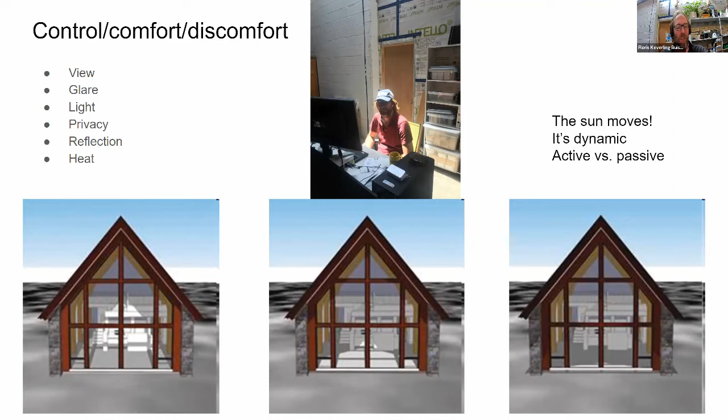But the sun moves, it's dynamic. So how can we actively manage it to help our passive house envelope? Why don't we do this on the inside? Well, if we do this on the inside, as you see here on the right side, the heat's already in the building. If the heat's already in the building in the summer, it's not as effective as doing it on the outside.

If you don't get any direct sun, we cut out a large part of the solar heat gains. There's a little bit of diffuse or reflected solar heat gains, but if you get the direct sun out of the building, this makes a big difference.

The glazing, if you know the glazing IGU nomenclature, on surfaces 2 and 5 there's normally the low-E coatings in the triple pane. It helps tremendously with improving the U-values of the IGU, but it also means the heat stays in the building, which is nice when you want it to, but not so nice when it's already in there, trapped between your interior curtain and the glass. It will most likely end up on the inside.

And as Nick Grant shows here, summer comfort isn't just about air temperature. We've learned about radiant discomfort, which can be cold radiant discomfort, but it can also be hot radiant discomfort in the summer. So move away from the hot glass. If we shade our glass, the glass will be colder, which also will prevent radiant discomfort.

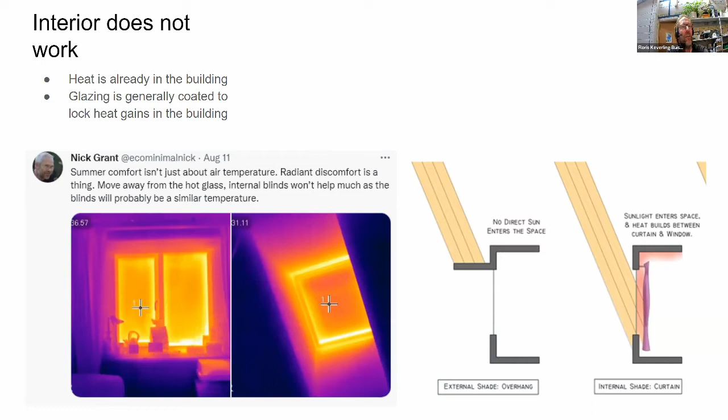So how do we apply this? How can we use our shades? Well, the benefits of exterior shading are universally applicable, not just to passive house. Any building can benefit from this. It can be found on all building types in a variety of climate zones: offices, schools, housing.

Even the old factories, the shed roof on the old factories, and artist studios, provided northern light, so you get the daylight without the heat. Unfortunately, no heat in the winter, but also no heat in the summer, which is critical in a passive house where we actually want to employ the high solar heat gain in the winter with the low sun angle, so it actually shines into the building.

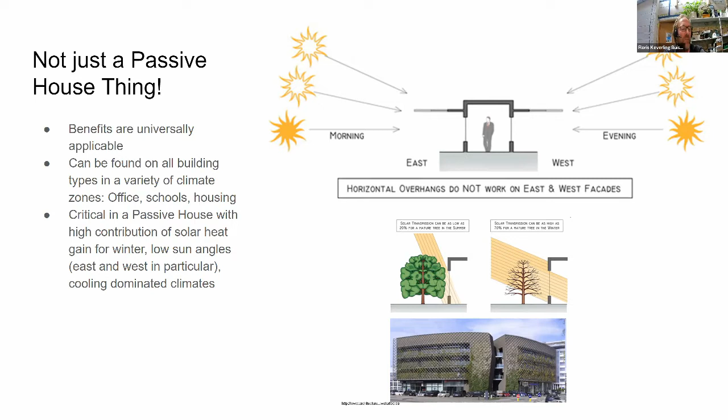But if we have cooling, now we need to keep it out at the same time. Of course, our deciduous trees can help with this, as shown here, but we also can automate this with exterior shading systems.

So here we see what the PHPP, as a ground rule, shows this effect of interior shades versus exterior shades. Exterior slats keep 94% of the heat out, and that's on top of the solar heat gain factor of the glass. So if the solar heat gain factor of the glass is 50%, it blocks 50%, and then we knock it down another 94%, to 0.06.

If you do it on the interior, you only get 30% of that solar heat gain blocked. And then, Tim, you want to expand on this, for how you enter this?

I'll feed in exactly. A little bit from the practitioner's desk here, as far as controls go, which is another subject we're bringing to you today. Once you have exterior shades, it's all about what you're going to do with them. Are they static? Are they manually controlled? Are they automated? Passive House Institute has looked at that as well. I can't exactly explain why they came up with the numbers they do, but we printed them on this slide for your reference.

In the PHPP, it's assumed you'll have a 70% reduction when manually operated exterior shades are used, and 80% reduction when automated. For the overheating potential of the building, the PHPP assumes 90%. I assume we could argue with the PHI whether these are fair numbers that represent these use cases, but it's something you need to keep in mind when modeling exterior shading.

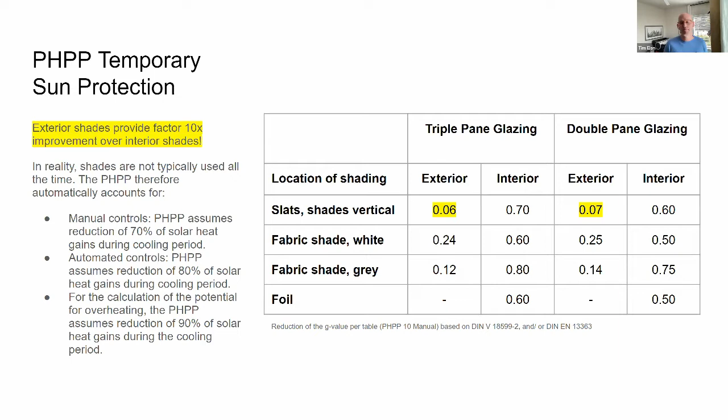I would add to that, from living with shades, you can see perhaps over my shoulder, that in reality, even if you have an automation system, you may still use manual controls from time to time and do overrides. I couldn't necessarily tell you how good these percentage numbers are that the PHI provides, but I can tell you from projects that are entirely manually controlled, that's never as good as having an automation system. If the owners aren't home, the shades aren't being controlled, so they may stay up or down, which means something. I live with a system that is fully automated, but we still as a family override that system from time to time. So just keep that in mind when modeling shading in the PHPP.

Yeah, so then if we look at the building code, you can see that it puts a very low bar and makes a simplification. In the heating dominated climate zones 4 through 8, the solar heat gains are actually free to choose in 5, 6, 7, and 8 - marine 4 is free to choose. But in the other 1 through 4, we are actually limited to the amount of solar heat we're allowed in, which especially in 4 is still a very heating dominated climate.

Of course we want to also avoid overheating, but the motorized shade should be an option to achieve summertime comfort and solar heat gain limitation while optimizing wintertime solar heat gains through fenestration. You can see we're underheated in the winter, but in the summer we could be overheated. But there's this shoulder season - if we have fixed shading, we have excessive shading in March and April. If we use movable shading, we can really optimize this and make the shoulder season longer, so we can passively heat the building but also avoid active cooling in the summer for a longer period of time. So the best of both worlds.

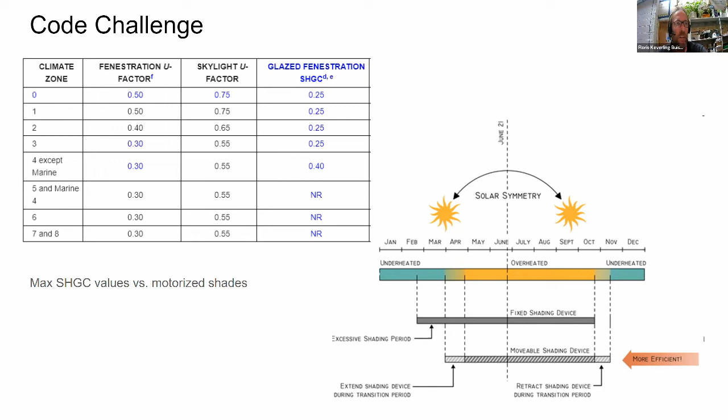Next slide. Here you can see max solar heat gain values versus motorized shades. Climate zone 4 is mixed, with a heating season larger than the cooling season in the figures below, heating degree days versus cooling degree days. But in 3C and 3A and B, it gets even more complicated - there's still a good heating load, but also a significant cooling load that we want to avoid.

Of course, climate zones 5 to 8 are heat driven purely, and that's why the ratings for solar heat gain aren't limited in the code. But we still want to keep that summer heat out where Tim lives, because there is still a cooling season there, even though the code doesn't acknowledge it. So in all climates, cooling should be avoided passively first, and we should try with active or passive manual blinds to stretch the shoulder season. That would be the optimum solution.

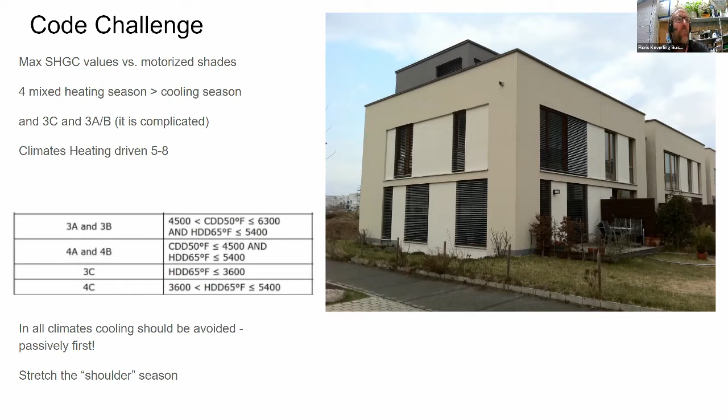Next slide. All right, I'll hook into it right here and talk to you a little bit about the system components, what makes up a good shading package.

Next slide. So the first thing we're going to look at here is the motorized shade itself. Most of you are going to be familiar with interior mini blinds, aluminum blinds, and for all intents and purposes, the exterior motorized shade is the larger version of that. Typically they're made from all aluminum, and we have slats that articulate in various widths and profiles. I'll talk about that a little more in a minute.

We have a line voltage motor at the top, and there's no smarts in that motor. Essentially, it gets power and it can turn one way or the other way, and that's all it does. As far as guides go, you get your choice of a fixed track, depicted in that image here, but there are also cable guided systems, which look more free-flowing or floating on a facade. In some instances where you have exposed glass corners that you want to shade, that's perhaps the more appropriate way of guiding the slats.

They can be mounted either on the exterior of the building in a recessed fashion, where they're either flush with the building facade or they stick out a little bit, or they can be fully integrated into the building where, essentially when they're up, you don't see them at all.

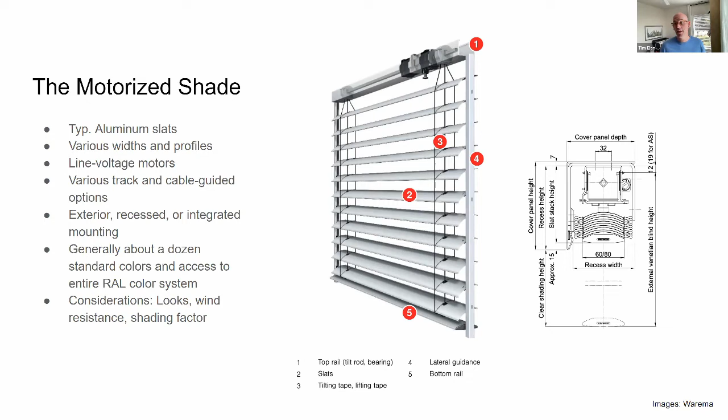I think it's fair to assume that they are safe outside for winds up to 30-35 kilometers an hour, so about 20-mile-an-hour wind gusts. The folded slats, on the other hand, can go quite a bit further, up to 80 kph, so about 55 miles an hour or thereabouts. They will be safe to be left in the down position.

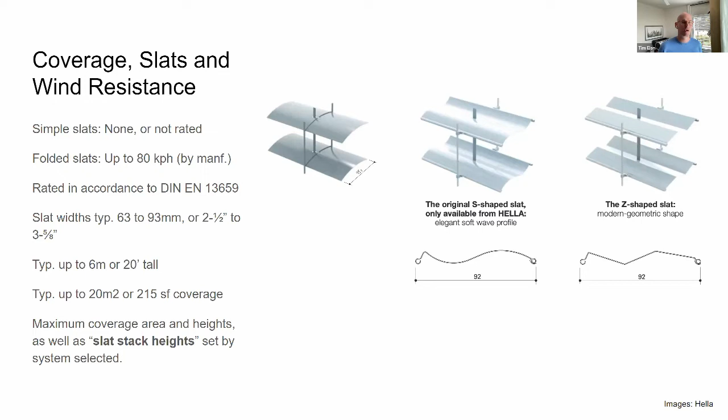So then let's talk about the shade box. That's essentially the container that the slats ride into when they're not being used. This can be purchased, this can be something that is made, or it can be a mixture thereof. It can be integrated into the building, it can stick out a little bit, it can be bolted to the face of the building. So it can be an invisible element where you don't really call attention to it, or it can be decorative - it can be a statement, something you integrate into your design language.

The size of the shade box needs to be sized exactly to fit the shade system, so this requires a little bit of integrated planning. What I didn't note here is that there's also a relationship between each window and the size of the shade that you put on it. One of the things we found over the many years we've integrated these into projects is that it makes a lot of sense to source these as one package with the windows you're purchasing, just to make sure there's good, tight coordination between the window sizing and the shade sizing, making sure they work well together.

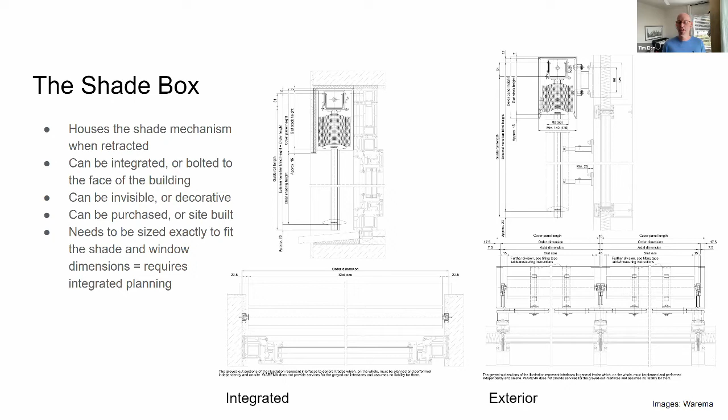In some cases the shade system may actually be affixed to the window itself. I don't want to go too deep on that today, but short of bolting it to the building, it can also become part of a window, storefront, or curtain wall system, which would suggest an even tighter integration when you're sourcing this. Next slide.

Next slide. So then I'll talk about the integrated shade box. This is the building that I'm standing in right now, a house I built a few years ago. And just a couple of pictures of an integration of a shade system.

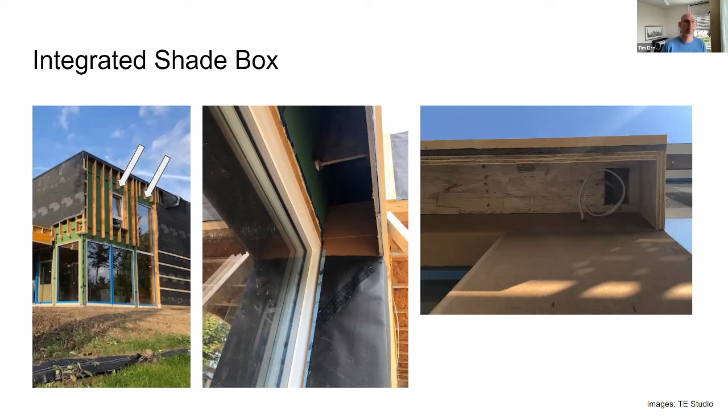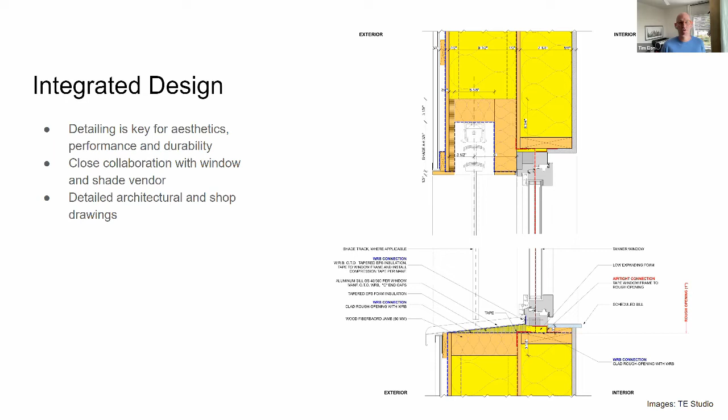So this sort of idea, as I mentioned, requires integrated design. The detailing here is key for the aesthetics, the performance, and the durability of something like that. Close collaboration with the window and shade vendor is needed to make sure this fits. Typically when we go into the shop drawing phase for a project like this, we send this to the window company and to the shade supplier, to make sure everything coordinates well with the architectural drawings and concept.

With some building automation, it can actually track where the sun is and adjust the shade accordingly. One of the benefits I tap with this system is that I favor daylight while still cutting the heat gain when I don't want it. So the opportunity here is that you reflect the daylight into the space so that it's well lit during the day, but you cut just enough sun so that direct heat does not penetrate the space.

As Floris pointed out, in a passive house in a cold climate, like I'm in climate zone 6 here in the US, you really want to manage that. We have tremendously low sun angles, especially on the east and west sides, where this becomes an absolute must, not to cook people out of those spaces. But on the south side, in the swing seasons, this becomes really, really important as well.

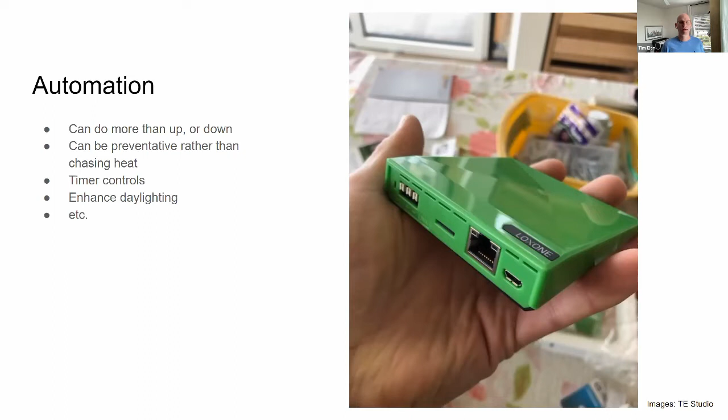Next slide. Then if you're going down the route of automation, now you can branch out into devices that can understand where you are on the planet. They can track the sun, they can track the climate inside, outside, the sun's position, as much from a daylighting perspective as a heating position. That can be a small little server like this. I'll let Igor expand on that. So that's the next step.

And then the last step of componentry that you need for a system is some kind of protection. So I want to be very clear here: these types of motorized shades we're talking about are not like the hurricane shutters in Florida. These are not to be brought down to protect your windows from damage when you get storms. They are purely here for all the benefits that shades bring to you: privacy, sun, heat, all of those things. And so they need to be protected.

And the two things you want to protect them from is high winds, as we already talked about a little bit, and the other piece is frost. That pertains to certain climate zones in the country like mine, especially in the swing seasons, early and late winter, where we may have conditions conducive to icing the shades over. You can imagine if a lot of ice accumulates on them, it becomes more difficult for them to move up and down or open and close. So a protection mechanism for frost conditions is also desirable.

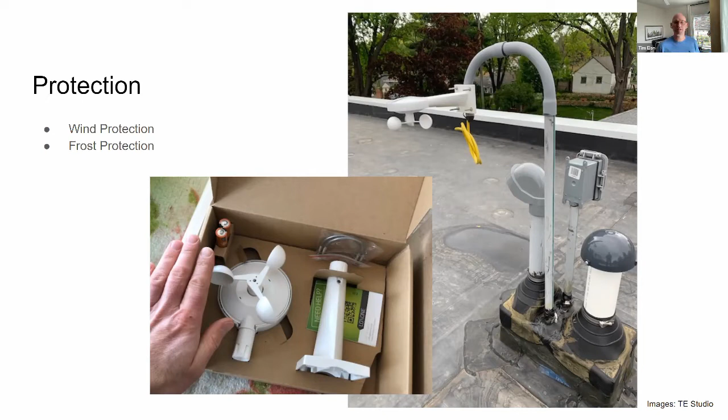Next slide. With that, I hand it over to Igor. Hi, everybody. I want to talk about the automation aspect of the shading from a standpoint that Tim and I discussed. It's a must for passive homes, cooling, heating, and I want to discuss why.

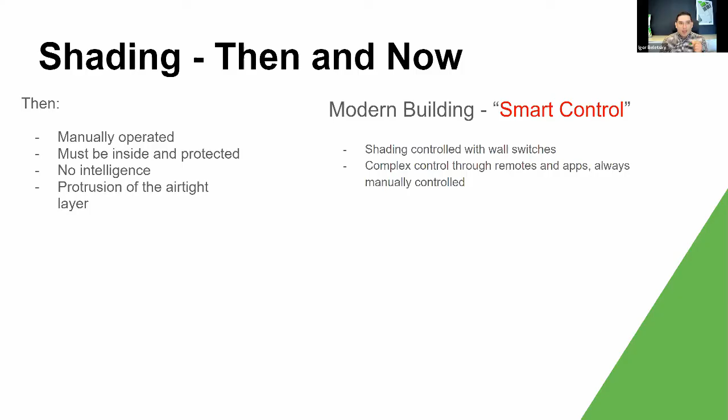So shading, what it used to be, as Tim mentioned, a penetration through the wall with a manual control. So whenever you had to adjust the shades, you would have to manually raise them and adjust them. It had no intelligence. You had to do it by hand, and again, protrusions through the airtight layer of your home.

Then came the smart control, which people call smart. I wouldn't necessarily call it smart. It was just control which you can operate without manual operation. You could press a button, or you can create scenes in the app where the shades would go up and down.

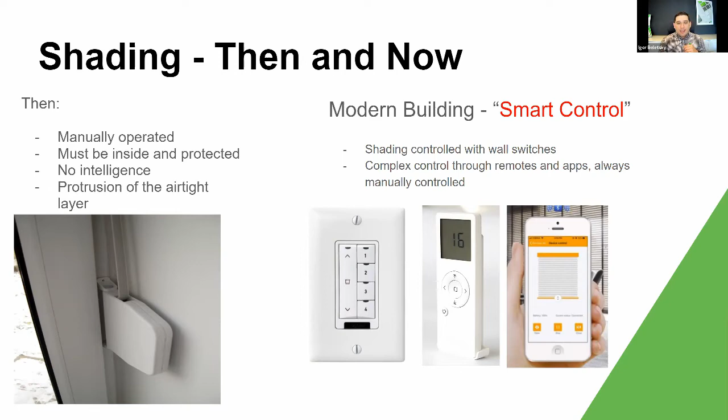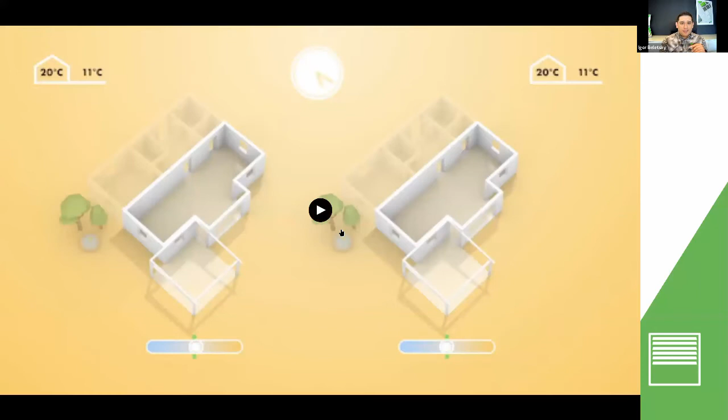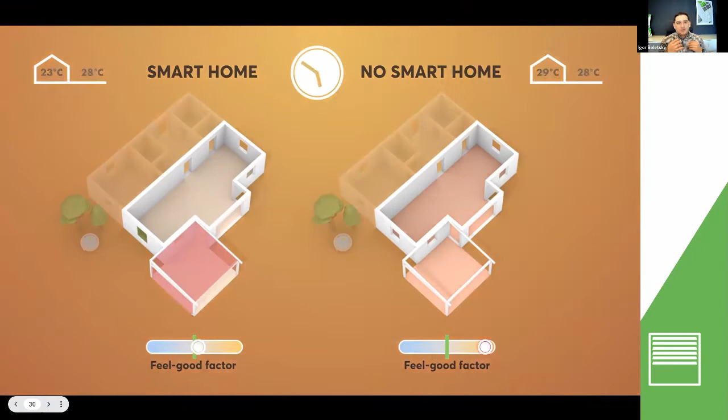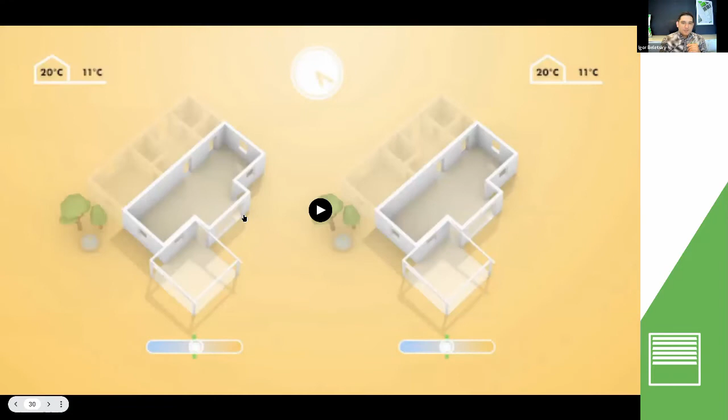And where Loxone comes in is not only control but automation. What we have designed in the system is something that you don't have to think about control. You don't have to think about controlling the system yourself, because to make it 100% smart, you would have to basically control them yourself every time the sun changes position, the temperature changes. If you need to protect them from frost or high winds, you have to do it manually. So you would have to basically be in your home and run around closing the shades, opening the shades to have them effectively cool or heat the house throughout the day.

So why? Exactly, because nobody can spend the whole day inside the house just thinking about shading, checking what the weather is going to be like, checking where the wind is, where the sun is coming from, what time of day, and where the sun is shining from which angle of the house.

Then we have different styles of actuators. In Europe, we actually have shading motors, but unfortunately we do not have them in the United States yet. Hopefully, as passive homes grow, we can get them in the United States as well. But we have other ways to bring the shades up and down and tilt as needed.

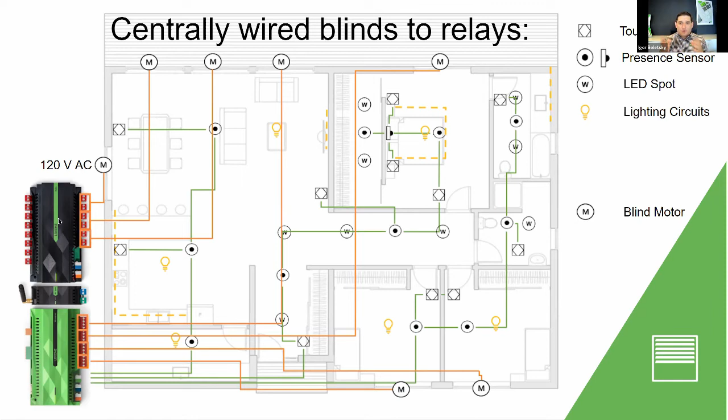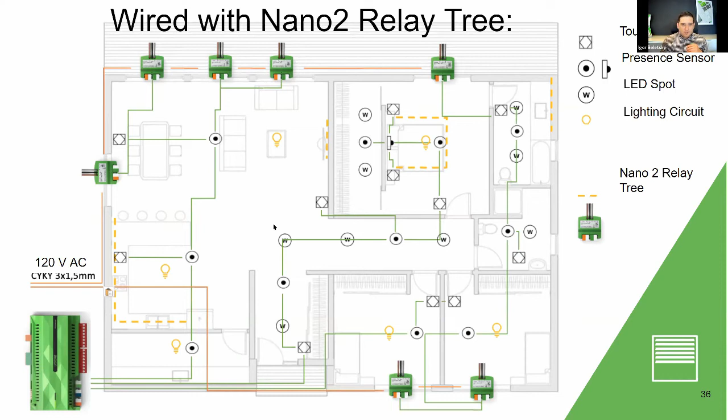What Tim has in his home is wireless shading actuators, which communicate with our mini server over a radio frequency. We call these devices air devices, and they not only communicate back to the mini server, they also create a mesh network, so you don't have to worry as much about spreading the signal. But depending on the distances, you may need to add other air devices, such as a tree-to-air bridge, closer to these shading actuators to keep the transmission levels at a normal level.

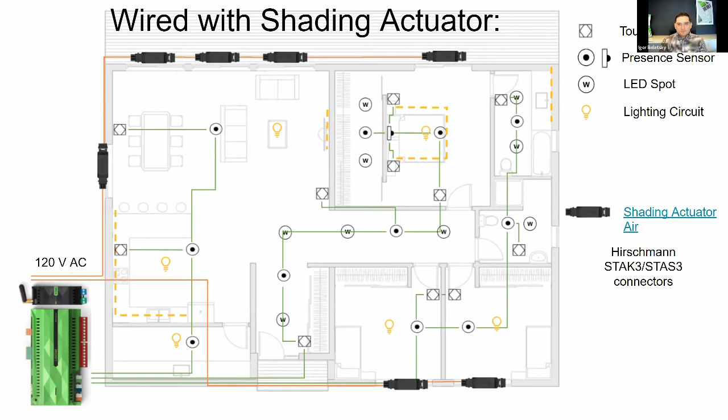Okay, so automatic shading is where it's at. What we have in our system is the ability to know where the home is, where the sun is in position to the home, where the windows are in position to the home, and control the system based on that.

So we have pre-designed blocks for shading, and they have been worked on and improved since the system came out. Loxone was born in Austria, and as you know, European shading is very important. So this automation has been worked on very heavily to optimize the way the system behaves with shading. We have automatic shading blocks in our programming, which help you automate the system with the input that you give it.

You also can visualize it in the app. Any smartphone, any tablet can be a point of control, not just the wall switches. And we can work with different shading types. Of course, we're talking about outside passive house shading, but with awnings, roller blinds, and so on, we can put the type of system it is into the Loxone config, and it will help you automate and give you the best benefit to the system.

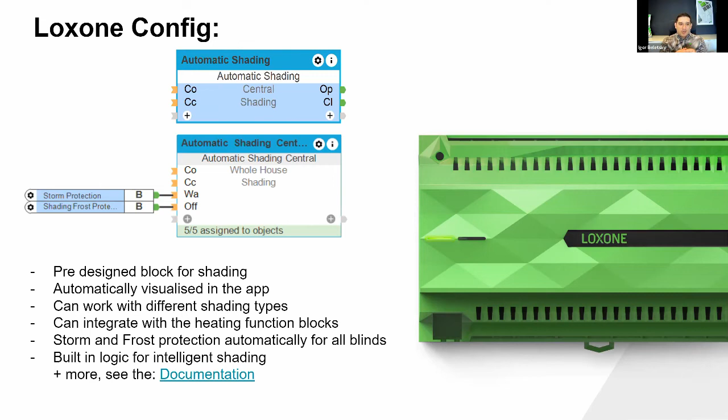So I wanted to discuss really quick what inputs we have in our automatic shading blocks that help control the shading. So for control, we have, as I said, our touch. We can connect to our heating and cooling of the room.

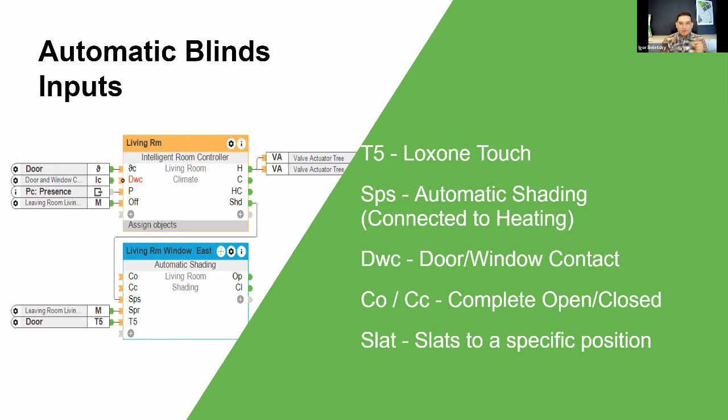We can also have door and window contacts, if you need to open the window, you can have the shades go up if the door and window contact is open. So in case you are using your shades in front of your big patio doors, the second you slide your patio door open, your shades can go up because the door and window contact lets the system know the door is open.

Something we touched upon again is the storm and frost protections. So what is included is our weather station, and it comes in two varieties. One communicates over radio air, as we say it, and one communicates wired back to the Loxone mini server.

The sensor can give you the wind speed, the current brightness in lux, and why we need that is because if there's no sun, there may not be a reason to shade. It also measures temperature, and has a rain sensor. The rain sensor is also used to know if we got rain and the temperature falls below a certain point, that's when we activate the frost protection.

With the purchase of the weather station in Loxone, you also get the weather service, which gives you internet information about the upcoming weather. So you can automate that. You know that the outside temperature is going to increase during the day, so you may want to start shading earlier, or if you know the temperature through the day is going to decrease, you may want to open the shades to get as much light energy as you can.

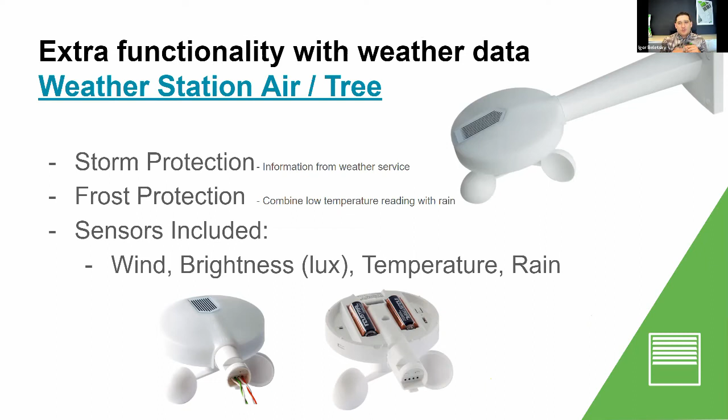So in our system, the automatic functionalities are just that, automatic. It's very easy to program. It's basically a click of a button, and the system builds these blocks depending on what hardware you have and what functionalities you want. Of course, after that, you can adjust, as Tim has done many times, to maximize the level of comfort of the system.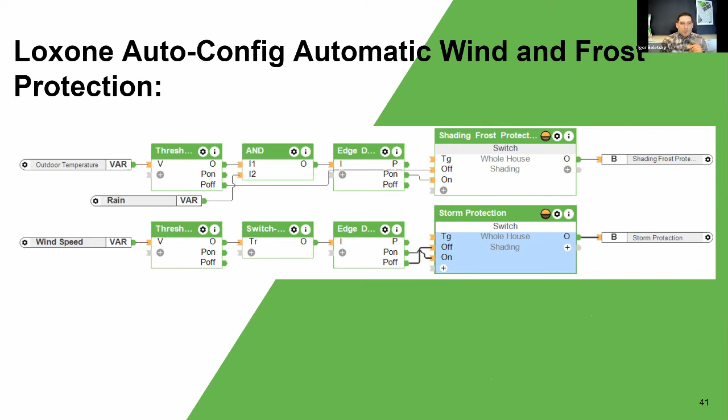The technical parameters for the best shading and to have the best shading correction functions - for that we need the window orientation. Where's the window pointing? Our system knows that if the window's pointing west and you're at a certain geographical location, when that sun will enter your window, or should enter your window.

The room temperature, because you need to know if the room needs cooling or heating with shading. Outdoor radiation - our weather station can tell us if there is sunlight to warm the room. The weather station is, I would say, a must, because even if you have the weather service, you may not be falling into that category. If the weather service is telling you there's a 40% chance of sun, you may have sun and you may not, so you need to know that at your given location.

Times of up and down for the shading - as Tim said, the shades are built for the length of the window. So you need to put in these factors so the system knows how much time it takes to close and open the shades, and the types of shading.

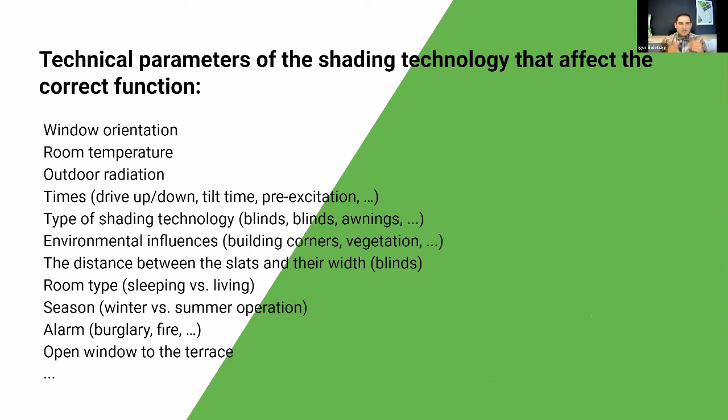Loxone tries to bring all of the components together so the building works as one. So if you have an alarm, somebody breaks into your home, or you have a fire, the shades will automatically raise up and lights will automatically turn on. For burglary, this is to expose the burglar. For fire, it's so people can get in safely and see what's going on inside the building.

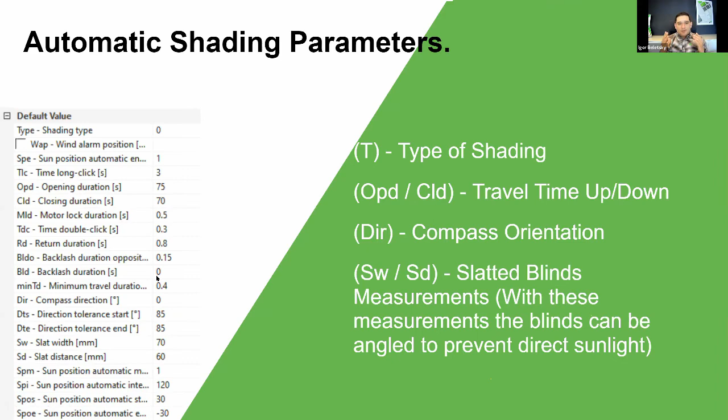These are some of the parameters. There's a lot to enter, but the more accurate you are with parameters such as degree towards, position of the windows, and the slat distances and slat width, the better the system can work together. The direction of the sun is important, so we know from where it rises and where it falls. The obstructions - this is the exact time the sun starts radiating into the window - matter too, since buildings or trees may block it, and that needs to be input to get accurate shading. Then there's the factor of when it's truly radiating. There's a lot of factors, but I won't go into all the detail, or I'll start teaching you how to program the Loxone system.

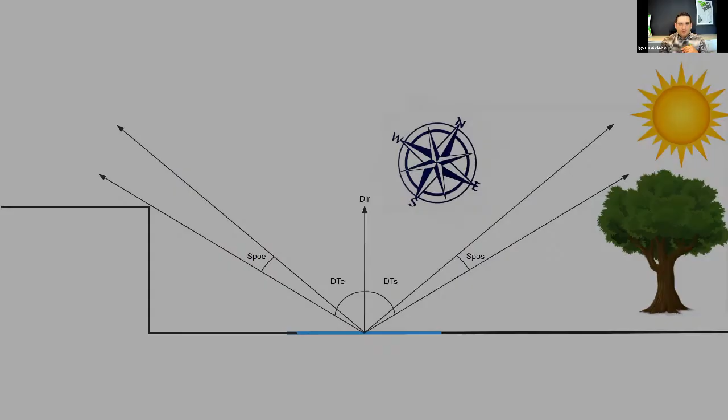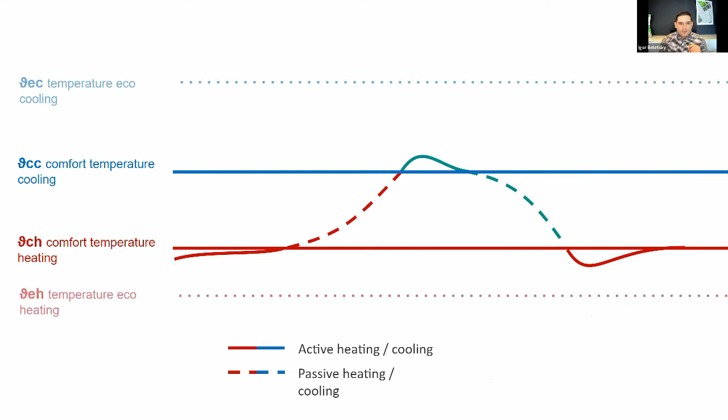As Tim mentioned, this isn't only for heating and cooling. There's also security in the Loxone system, overheating protection of the rooms, flexible grouping so you can raise and lower all your shades at the same time, storm protection - that's protection of the actual shades, not the building - plus privacy and frost protection. Tim, I'll hand it back over to you.

Thank you, Igor, much appreciated. Hopefully your takeaway is that you can go very deep on the programming once you have a backbone like that in a building. But from both a practitioner and user perspective, you don't have to understand or populate all of that - a lot happens automatically and will be very responsive. What Igor showed is that you can really fine-tune the system tremendously. I've seen systems that are very basic in setup that work wonderfully, and systems very detailed in their settings that also work wonderfully. For your project, the truth may be somewhere in the middle.

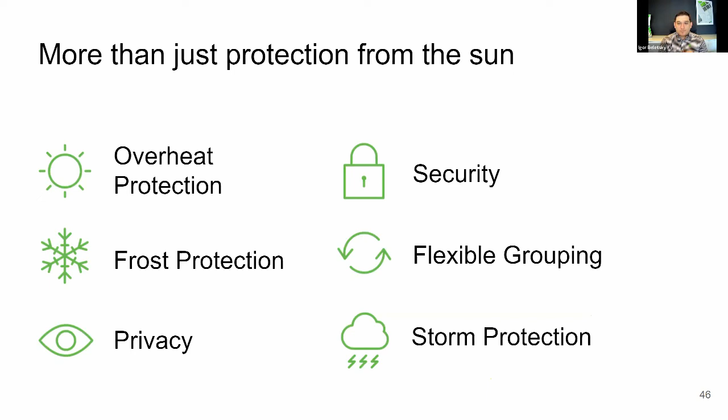The important part is that with the automation system, you can get all these benefits as pointed out. Let's jump to the next slide - I want to close you out here. We're getting close to the hour, and Ken is having some technical difficulties, so I'll try to fill in for him with Q&A. But before we get there, this is a question I often get from clients: what's the maintenance?

Before I talk about cleaning, I'll tell you I've worked with systems like this in North America since 2008, and we have never had one break or fail yet - they are fairly resilient. As Igor pointed out, in Europe they've been using this longer than we have, and you see it on many, many buildings of all types. The manufacturers have a lot of experience making this product resilient and durable, and we've really seen that - they do well in our markets here too.

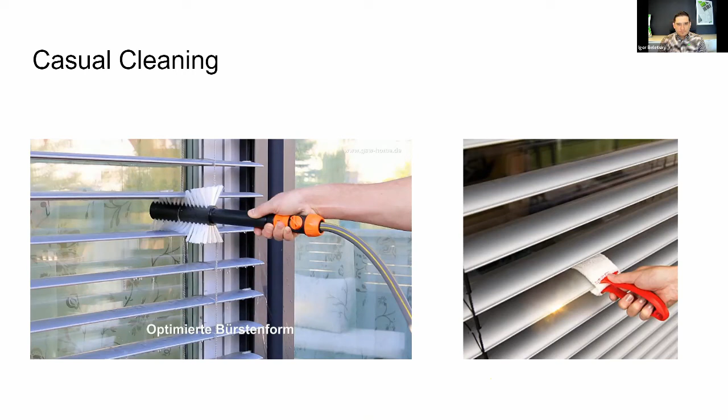When it comes to cleaning, I've had people ask me that question. Like anything, like your windows, every once in a while you should clean these systems. Here are a couple of pictures showing how you can do that yourself. For a single family home, these are the most appropriate ways - short of just taking a rag and wiping them down, there's a hose attachment you can use, or you can order online these specialty formed rags, like the one on the right-hand side, to help you swipe across these units.

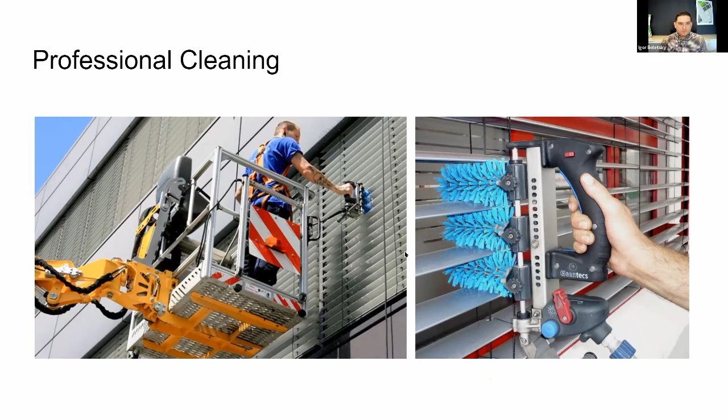The first question is from Vlad. He's asking, will the Warema exterior shading systems be available through 475? Floris, are you there? Yes, I'm here. We supply both for Optiwin and for Lamalex exterior shading systems that match with those systems very well. But it's kind of a group deal, so we don't do the shades by themselves, because that's really inefficient to ship in that sense. That's how we're able to bring exterior shading systems into the North American market, which can then be integrated with automatic systems like Loxone.

The next question from Sam is about incentive programs. He mentions an example from Vienna where the government pays landlords to install solar shading, and asks whether we're aware of any incentive systems, city or state, in the US for these types of systems.